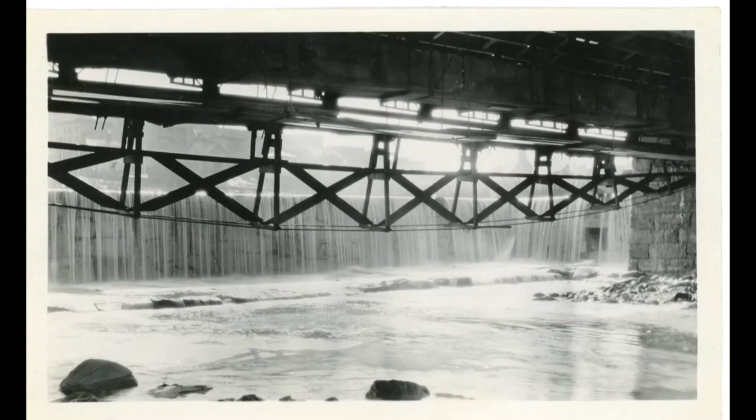The city grew explosively. By around 1900, 3/4 of the city's population was either foreign-born or the children of foreign-born workers. The native-born Yankees were increasingly well off and were able to acquire luxuries and take up many hobbies. After World War II, Main Street was lively with returned soldiers and their families. Fitchburg's urban center had grown up with commercial, industrial, and public buildings, all crammed close together. As the city got wealthier, its practical industrial structures were increasingly replaced with deliberately designed and monumental, classically influenced styles.

But Fitchburg was expanding so quickly that there was money to try out every innovation. There were streamlined streets, prefabricated diners manufactured in Worcester and influenced by railcar manufacturing, which was also early Fitchburg history. And there were new approaches to factory design and production. The example of the Simonds windowless factory in 1940 was published all across Europe in the architectural press.

Carl Koch received his master's from the Harvard School of Design in 1937. The next year, he traveled to Sweden on a fellowship and became interested in the Swedish approach to fabrication. When he came back, he built a home for himself in Belmont, Massachusetts, along with 5 other houses that were hailed by Progressive Architecture magazine as one of the best known and significant groups of contemporary houses in the world. The Snake Hill location was chosen because of its wonderful views of Boston, its convenience to stores and trains, and because it was cheap, because it was thought it couldn't be possible to build on those rocky ledges.

One of the innovations that the builders installed in the development was a boiler house that heated underground pipes and kept the street clear of ice and snow. This is famously true of Stockholm, Sweden, as well.

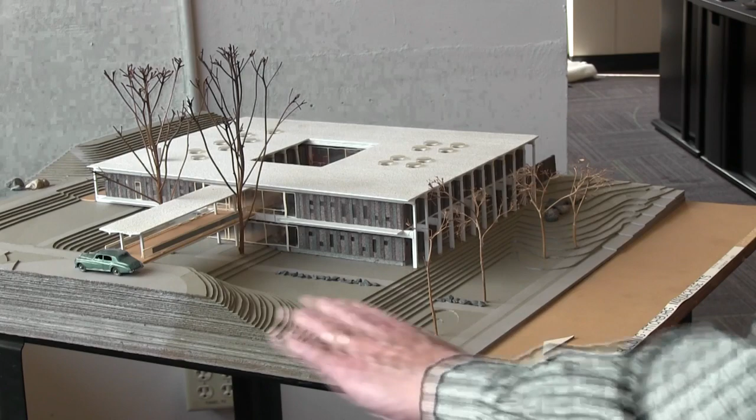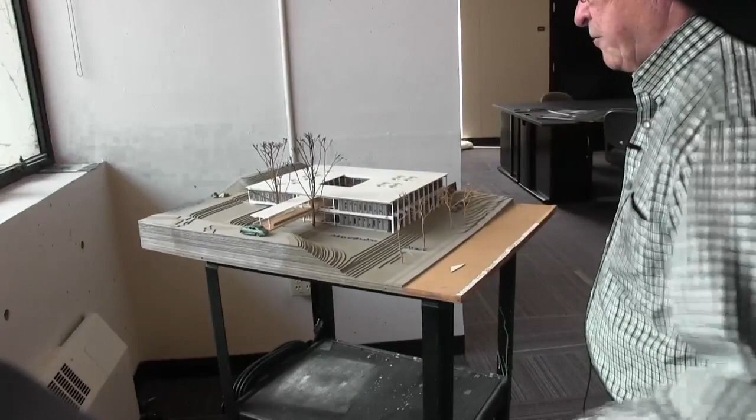With an architectural model, they were able to show the contours of the property. This is, I believe, River Street running down along this side here. North is up in this direction, and the hillside travels up above. The main traffic circle for the main entrance to the executive offices is at the top here, and it bridges over as the land falls off into the second level of the new proposed headquarters.

As you can see, it is kind of a rectangular donut shape in its plan, with the offices on the upper level going around an interior courtyard, letting light and perhaps some ventilation into the interior, and the lower level just a little bit above where River Street bends under the railroad bridge. So this is the architect's rendition of the project before it was built, used to convey in three dimensions what the design was going to look like.

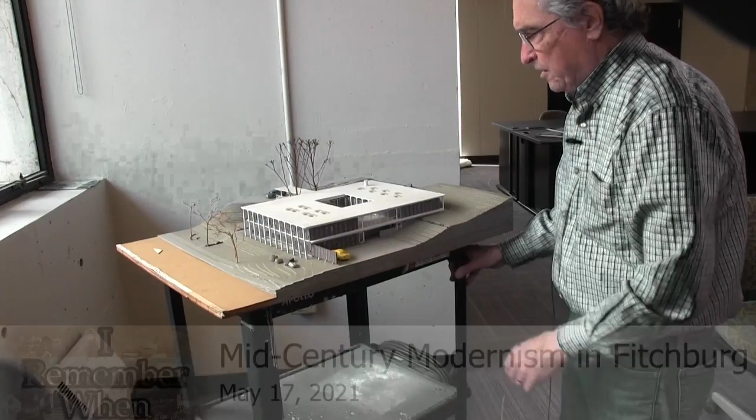A nice thing about an architectural model is that it's three-dimensional instead of just drawings, and the client can see all of the various aspects of the building. This is the facade we usually see driving by on River Street, and the side that starts getting back up into the hillside that we normally don't have access to. There is a small parking area on the east side of the building. And as we rotate around to the back side, we can see the hillside coming down, so it's a two-story stepped-in double level, with the main entrance on the upper level and an entrance on the lower level also.

There is a stream that actually comes down through the property, and that was incorporated in the extensive landscaping that was done for this property, and still an amazing, beautiful landscape property. And we can still see the pond, which is actually fed by a stream that comes from way up the

hill, and there are a series of waterfalls that have been enhanced through the landscape design, so they have some nice bubbling water coming down through the property, and another pond here. I'm not sure where the outlet goes, but it all eventually gets down to the Nashua River. It's not too far away from here.

This was the concept, and we can see from news releases and other pieces that there was actually incorporated a heliport on top of the building. I believe it might have been in this back section over here, where people could fly into the Fitchburg paper headquarters with their helicopter.

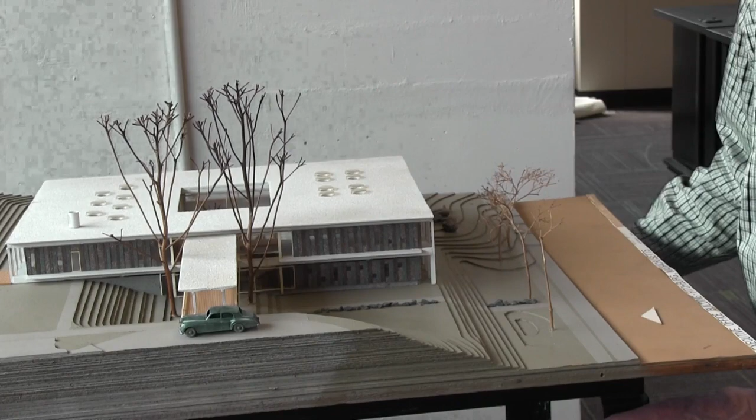And we can see there's overhangs built into the building that provided some shade, certainly for the western sun coming in here, and kind of smaller windows on this western side where we get, particularly in the summertime, that overheating low west sunshine coming in.

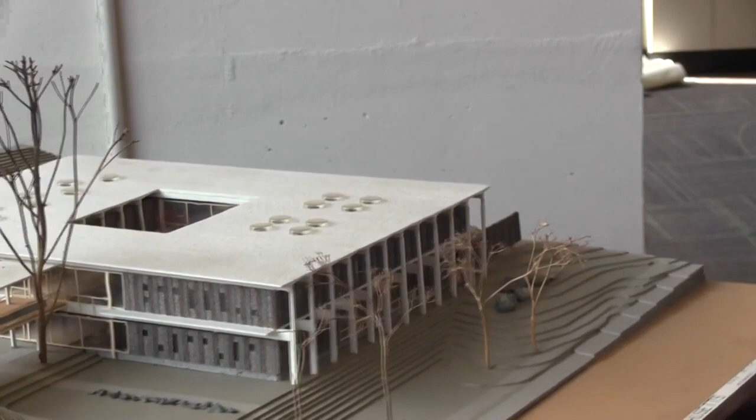On the southern side, again, we have overhang on this side where the 2 stories are actually set back from this facade. And this is something we see in this model and some other of Koch's buildings, such as the Fitchburg Public Library, that has very similar types of overhangs, that the walls are actually set back from the actual roof section.

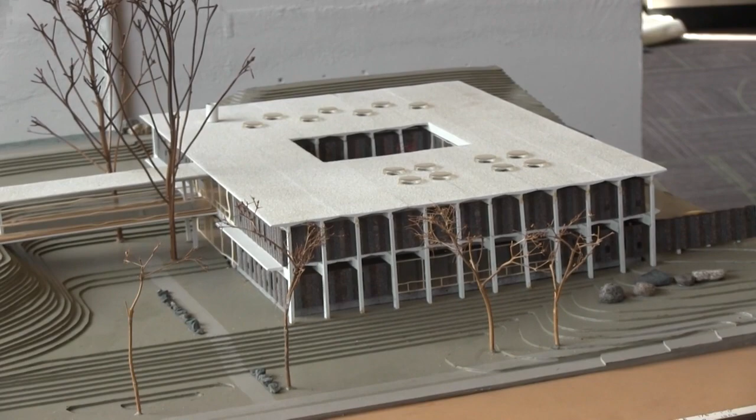This is definitely designed to meet the topography, and certainly parts of Fitchburg have challenging topography to them. And this hillside, like many places in Fitchburg, has a steep slope going up with it. And this section almost appears like it was partially carved out of this area to allow the 2 stories of the administrative offices.

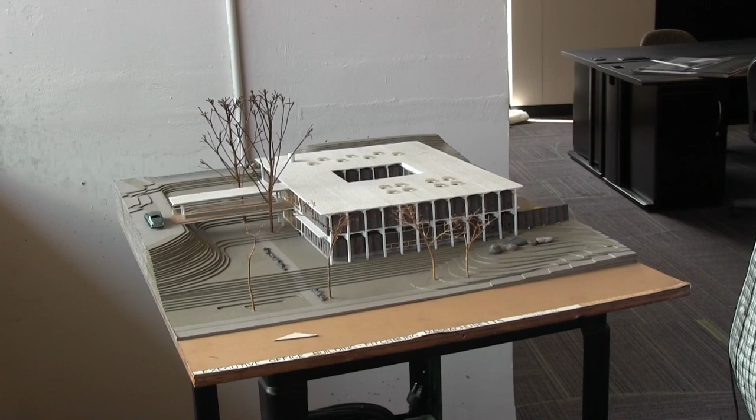There were paper plants that were basically across the street, and all up and down the river, as were other manufacturing and paper businesses here in Fitchburg. So again, this was designed in the 1950s, and as we look at the evolution of architecture, the way architecture is done is quite often governed by the current technology of the day, what the building materials were, how could we make longer and longer spans without having columns within structures, column-free areas.

In this case, lots of light into the buildings with more windows and openings, and using the latest technologies. As technology advanced during the early 20th century, structural steel became more and more common. We had cast iron, we had some cast iron bridges and things like that from the Civil War period onward. The railroads were using lots of steel for rails and their cars and engines, mid-19th century forward.

But we're starting to use more and more structural steel to create longer spans that started replacing a lot of the wood framing that we have in our Fitchburg buildings. And that certainly started to change the way buildings could be built, that we could be using structural steel to support the floors, to support the roofs, and by having columns, even on the exterior of our building,

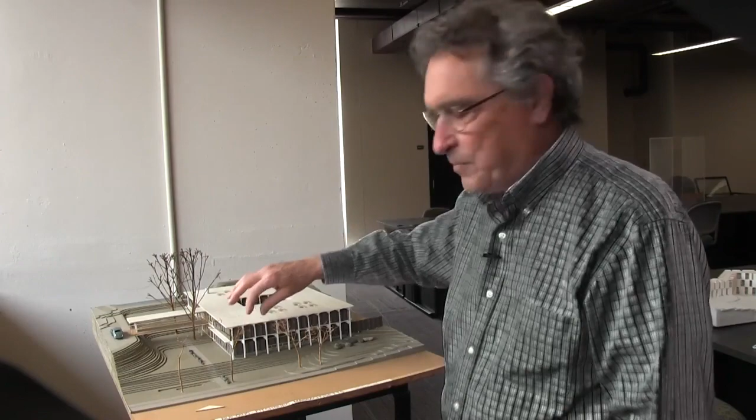So above each one of these columns in front is a structural T.

I'm just going to tilt this up a little bit. Focus in on it more, if you can see those. Am I up too high? Nope, that's okay, I've got it. Oh, that's a great shot. Let me see if I can get even closer.

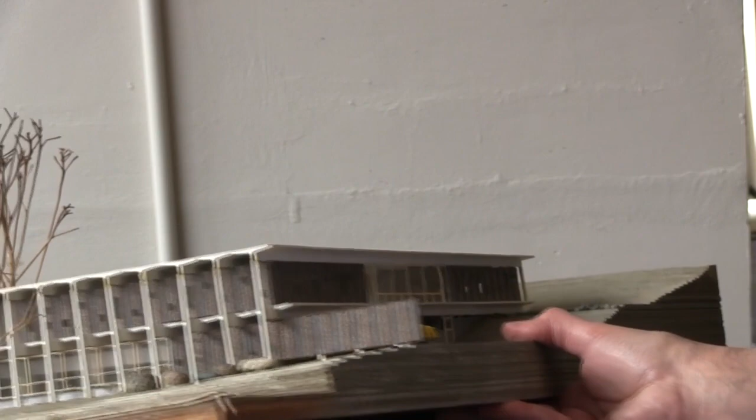Okay. So on each floor, but particularly at the roof level, we can see the wide T. It's maybe 5 or 6 feet wide on the top, it starts halfway between each column, and the bottom portion is this little section right here, and then it sets on the post. You can kind of see the depth of that over in here. These are called structural Ts, made with precast concrete, and this is the evolution happening mid-20th century.

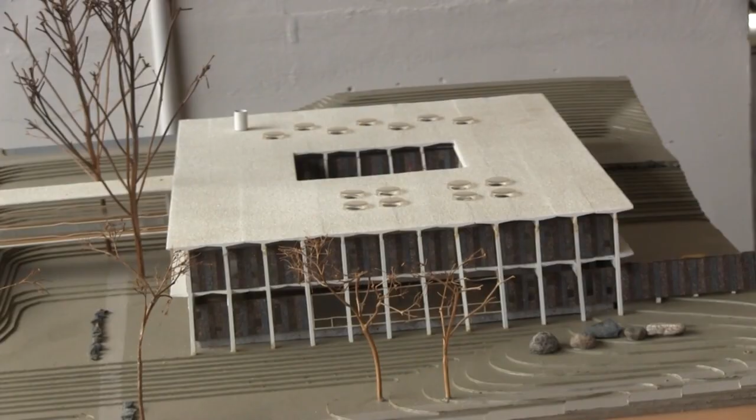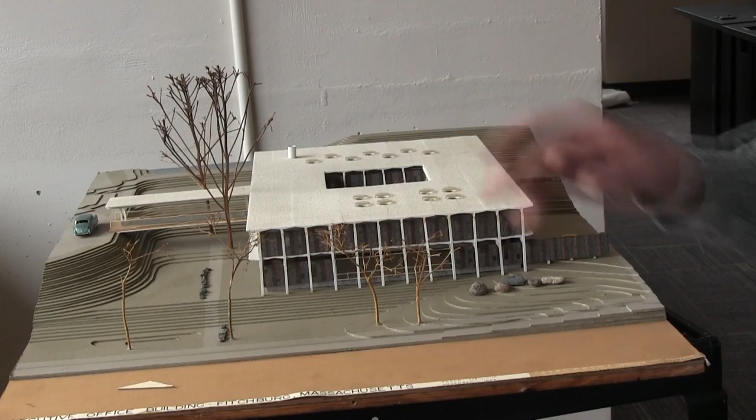I think the Wallace family and Fitchburg Paper were certainly into using the latest technology in their manufacturing to produce better paper at less cost, and the same way they looked at their building as using the latest technology. So Carl Koch was saying we can get long spans. We can span from here all the way into the inside courtyard with a single span, no columns in the middle, by using these precast structural concrete Ts.

We feel that we have one of the finest buildings of its kind in the New England area. See what a charming effect has been created through the use of multicolored, ribbed, porcelain enameled steel panels. These contrast with the stark white columns and the beams of pre-stressed, precast concrete.

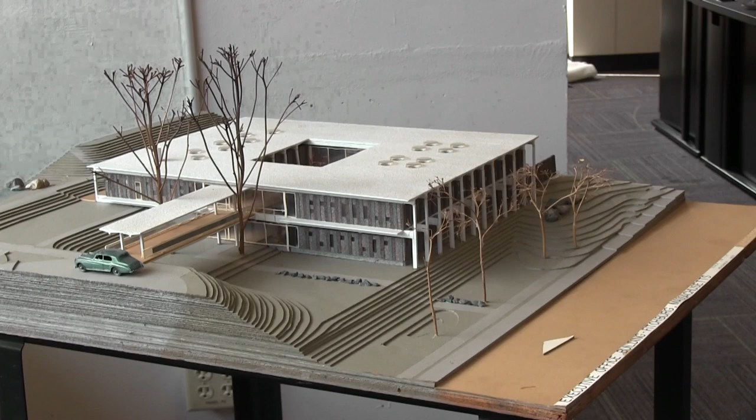Yes, those last words were from their dedication program for the building. We were just noticing what a beautiful model that is that you're discussing. That's part of the Fitchburg Historical Society's collection, and it's got a little Rolls Royce on it. That would be George Wallace III's Rolls, and because George Wallace III loved to ride his helicopter all around Fitchburg, it ended up with a helicopter pad. So a building that also expressed a little about the person paying for it.

But the model, you were saying it's a striking model. Yeah, well, it communicates everything the building is trying to be from the designer, the designer's interpretation of what the owner wanted to construct and have as his memory. And so the model stands the test of time to show us what it was and what they wanted, even if there's alterations or damage or destruction.

We always have the models to go back to, and we don't do those anymore. That's a great point. When I ran across that model in our collection, I recognized then which building it was and decided I really want to take a second look at that building. It's much more striking than I had realized just driving past quickly on River Street, that it shows you the ideas. You mentioned too how different it was; this is 30 years after the Simonds Windowless factory, and they're trying to do some new things here at this point.